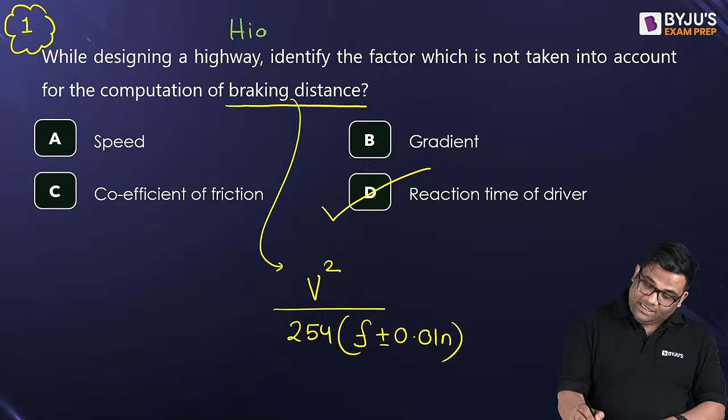So let me write down the subjects also - first question was from highway engineering, and second question was from Geotech. So we'll be mixing the questions.

Question number 3, RCC. Answer this question: lateral ties are provided in RCC column for what? Come on, answer this question very fast. I am waiting for your answer.

Lateral ties in RCC columns are provided to resist buckling of longitudinal bars. These are the longitudinal bars in a column, and we provide ties like this to avoid the buckling of the longitudinal bars. Correct answer.

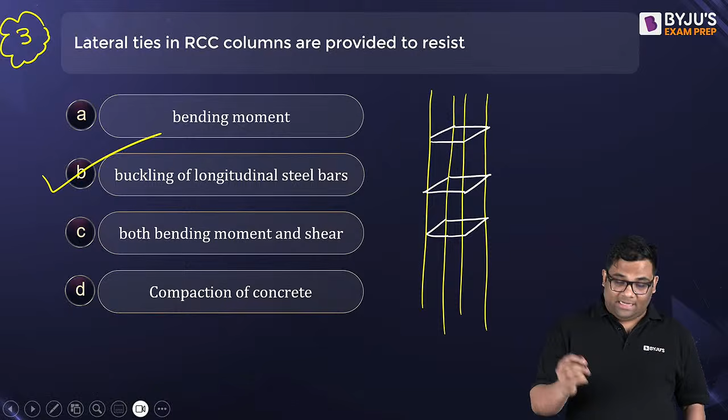This is from RCC. Next question, question number 4, also from highway engineering. Answer this.

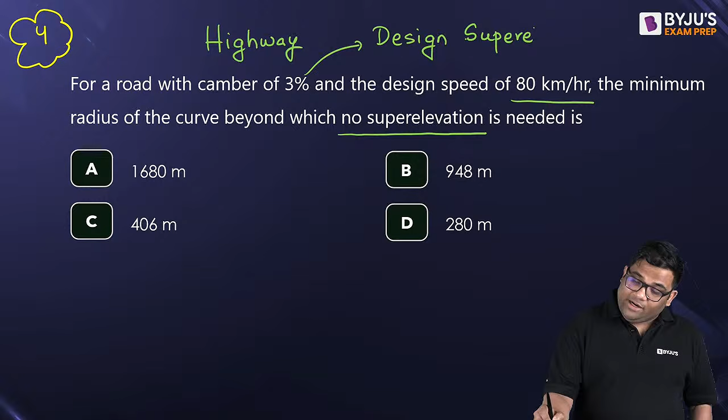Camber. For a road with camber of 3%, design speed is given: find the minimum radius of curve beyond which no super elevation is provided. That means this camber only becomes the design super elevation, and you know the formula for design super elevation. Put that and give me the radius.

What is the formula for design super elevation? It is V square by 225R. So here the camber becomes the design super elevation, that means this is equal to 0.03.

V we will take in kilometer per hour, that is 80 kilometer per hour, so 80 square, now divided by 225r. From here you can find out r, and r will be in meter. This formula is designed in such a way that r will be in meter.

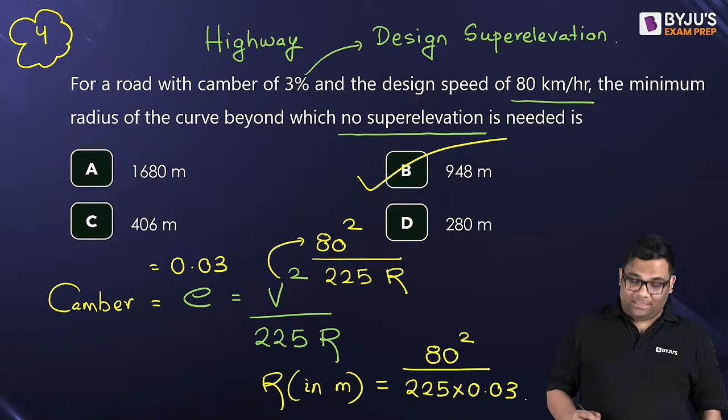Question number 5 now. What is the valid relationship for minimum shear reinforcement? Again another question from RCC. You are mixing the question and solving them, because in the final examination the questions will be mixed in nature. So what is the answer to this?

I will give you a hint. The spacing formula is 0.87 Fy Asv divided by tau V minus tau C into B. Whenever we are discussing the minimum shear reinforcement, you will replace this tau V minus tau C with 0.4. Now see which is the correct relationship.

So here I can write down 0.4 B into Sv less than equal to 0.87 Fy Asv. As many have answered, this is the right answer.

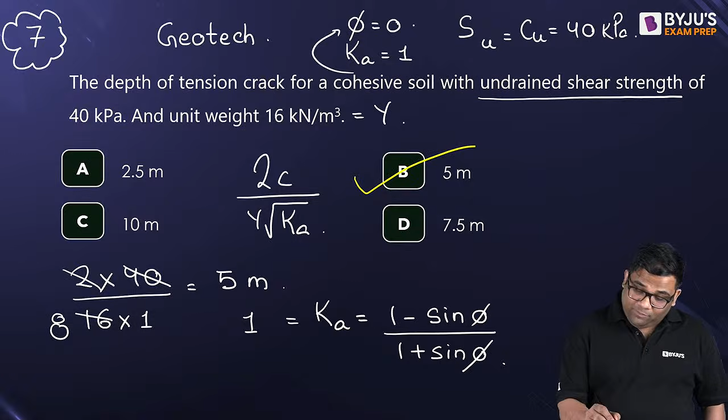Option B. 5 meter. It is what? Depth of tension crack.

See, if they are asking you critical height, that is 2 times of your tension crack. Yes or no? If they ask you critical height, that is 2 times of tension crack. It is what? Only depth of tension crack.

Very good. Question number 8. So again from RCC now. So we changed our subject from Geotech.

A little tricky question. Flexural cracks appear at bottom of a beam at tensile stress of 3.13 MPa. Means what? This is your modulus of rupture, because at modulus of rupture you get the tension cracks. 4c by gamma is for the critical height. It is tension crack which is different.

So FCR is given as 3.13, the modulus of rupture, right? And this is 0.7 root FCK.

And what is asked? Design compressive strength. The design compressive strength formula is 0.45 FCK. So what you are going to do? You are going to first of all find out the FCK from here, and then put it here and give me the answer.

Now solve this question. I give you some time, a little numerical nature. We'll solve some numericals also. Okay, some students have solved.

Very good. See, if you solve this, you will get FCK is equal to 20. So this will be 0.45 into 20, so that is 9 MPa.

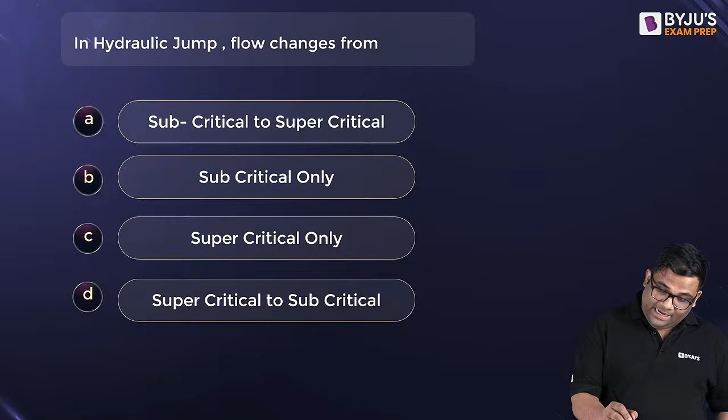Very good. Question number 9, open channel flow, OCF. As I told, we will be mixing the subjects because in the final exam, all subjects will be coming. Therefore, this mixed and fast civil sessions are very important.

Come on, very fast. In hydraulic jump, flow changes from where to where? This is a hydraulic jump. So what is the flow here and what is the flow here?

It changes from supercritical to subcritical. Here the flow is supercritical, that means the Froude number will be greater than 1. And here it is subcritical. Very good.

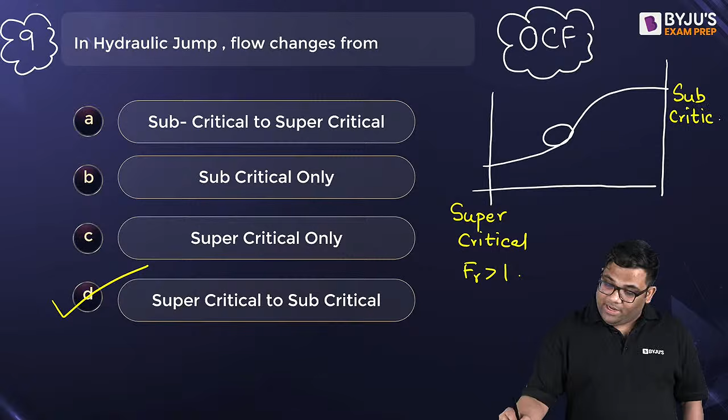Next question, question number 10, from traffic engineering.

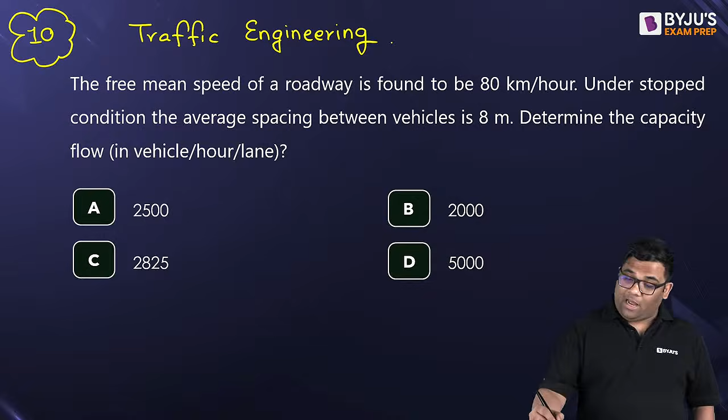Solve this question. The free mean speed is given, right? It is given 80 km per hour, that means this is your VSF. Now, under stopped condition, the spacing between the vehicles is given. This is the spacing within the vehicles at stopped condition, means jam condition, right?

Determine the capacity. Capacity means the maximum flow. And we know the capacity or maximum flow formula is VSF into Kj by 4. But how to find out Kj? Kj is nothing but 1000 by the spacing under jam condition.

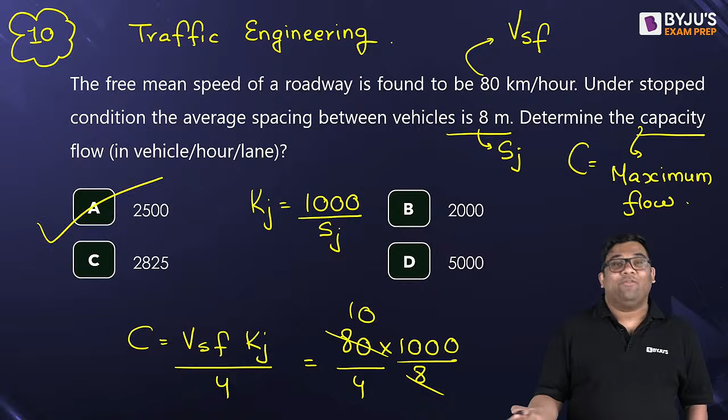So this I can write down as 80 into 1000 by 8 given, and then further divide by 4. So how much are you getting? You are getting a value of 2500. Very straightforward questions. So 10 questions we have completed.

You have to go very fast. Question number 11, again from highway engineering. Come on, solve this question. Grade compensation.

Highway engineering, grade compensation. I will not help you now. I'll give you some time. Come on, fast, fast. I'll have some water by that time.

See, 1 in 20 means percentage by how much?

Percentage wise, it is 5%. Now grade compensation means the reduction. So grade compensation is what? It is 75 by R, or 30 plus R by R.

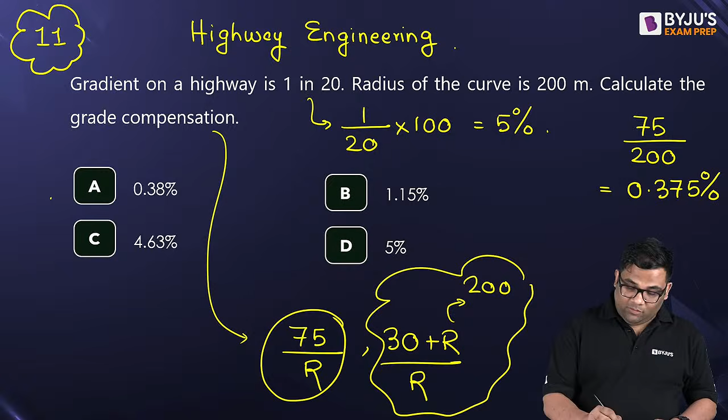You can see that if R is 200, obviously this will be very large, so we take the minimum one, 75 by R. So 75 by R, which is 200, I will get 0.375 percentage. Round figure is 0.38%. Very good. Question number 12, and this is from Geotech.

Come on, solve this question. Question number 12, Geotech. The stress at a point Z depth below a line load. If we have a line load, what is the stress at a point Z depth here? What is the formula?

What is the formula? Let us see who answers this question correctly. Fast, fast, no time. You have to do it very fast. We have to complete the whole session before 75 minutes, 100 questions. Yes, the answer is D.

2Q by pi Z. If it was a point load, what is the formula? Point load is 3Q by 2 pi Z square, right? Just below the point load, it is 3Q by 2 pi Z square. It is 2Q by pi Z, not Z square, just Z.

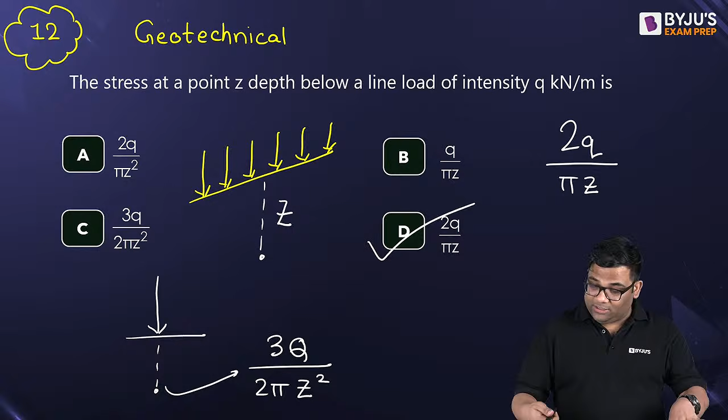Yes, very good. Question number 13 from RCC. So we switch the subject. For a span of continuous beam of length 13 meter, what is the allowable span by depth ratio? Yes, correct Akhil, not Z square, only Z.

Come on, fast, span by depth ratio. See, the ratios are 7, 20, 26, right, for cantilever, simply supported and continuous.

But here, this is for span less than 10 meter, otherwise we multiply by 10 by span. So span here is 13. So you can see getting how much? 20. Very good. Question number 14.

Okay, from soil mechanics, very fast. Grain size distribution. What is the answer to this? Steep graph. If we have a steep graph in your grain size distribution, then that means what? Like this, what is the meaning of this? Yes, it is uniformly graded.

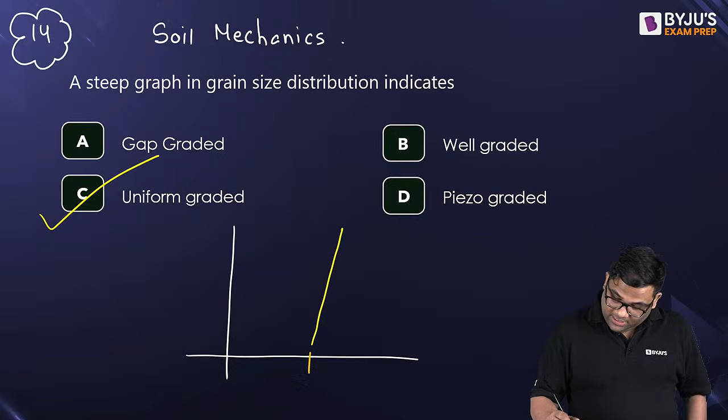See, that means most of the particles lie in this small range. Means uniform size, uniformly graded. Very good. Question number 15.

Again from OCF, question number 15. Come on, answer very fast. For an efficient rectangular channel, yesterday I took one video on this. For an efficient rectangular channel or section, hydraulic radius is found to be 0.62. The width of the section, what is the answer to this? Let us see who answers this correctly. What is the width of the section?

See, hydraulic radius is given as 0.62 meter. Now that is Y by 2 for a hydraulic efficient rectangular channel. So I can say Y is 1.24 meter. And what is the width of a hydraulic efficient channel? It is 2Y. So answer is 2 into 1.24 meter. How much is the answer?

2.48. Understood this? See, hydraulic radius is given this one, and this is Y by 2. We know the formula. This is for an efficient rectangular channel. Yesterday also I took one video in the round series, also I taught this, right?

Yes. Everybody clear with this question? Answer is 2.48. Everybody is clear? Akhil has answered correctly. Shall we move to next question? Clear ho gaya? Okay, let us go to the next question.

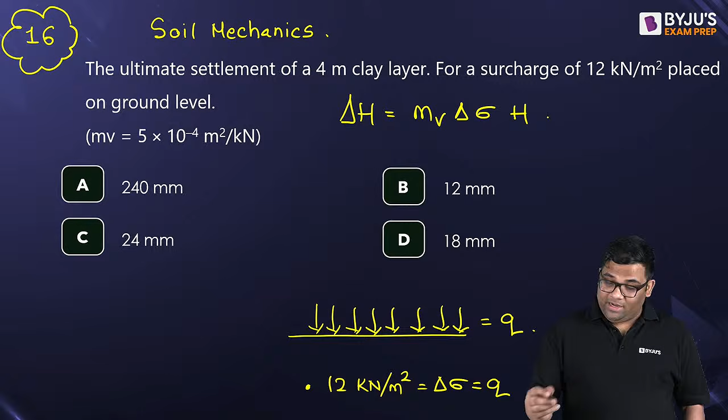This is the formula. Now I have told in many videos that whenever there is a surcharge, the increase in stress at any point will be equal to the surcharge. So delta sigma will be equal to the surcharge, right? Now mv is given, H is also given.

They have asked in mm, so I'll put this as 4000 mm. So what is the right answer? It is 5 into 10 to the power minus 4. The stress increment is 12. You see the units, it is meter square per kilonewton, and this is kilonewton per meter square, so these two get cancelled. And then this is 4000, I can say 0.4 into 10 to the power 4.

Question number 17, from railway engineering. Come on, answer this. The ruling gradient is given as 1 in 250. If you find out the percentage, this is 1 by 250 into 100. I can say this is

0.4 percentage. The horizontal curve is 3 degree. So what is the permissible compensated gradient? First you find out the grade compensation. Yes, it is a BG track, means what? The grade compensation will be 0.04 into the degree, so this is 0.12 percentage. So I can say the compensated gradient, many students have answered also, very good. The compensated gradient will be equal to 0.4 minus 0.12, that is how much?

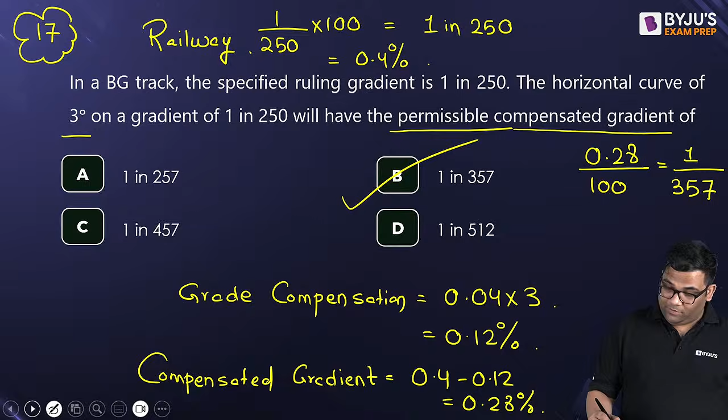Something from strength of material now. The ratio of modulus of elasticity or Young's modulus and modulus of rigidity is given, how much? If the Poisson's ratio is given as 0.2. Very straightforward question, you need to know one very simple formula. What is the answer to this? Come on, very fast. I'm going slow, we are going slow, no, we have to make it fast. How much is this? Tell me, ladies and gentlemen.

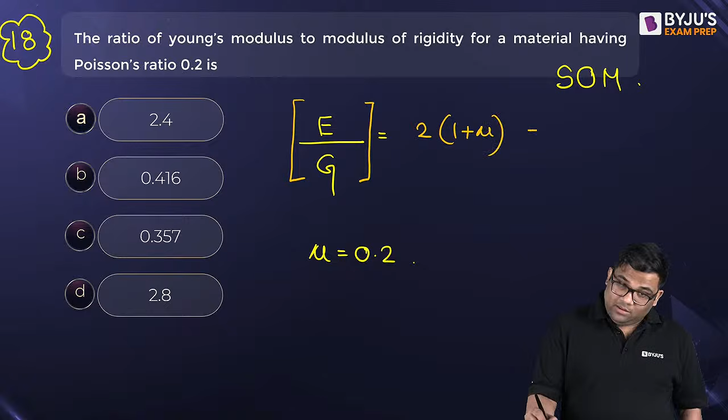What came? The formula is 2 into 1 plus mu, na? So what is the answer now? It is 2.4. Very good.

Next question, question number 19. Anchorage value, RCC returns. Tell me. The anchorage value for a 135 degree bend in a 20 mm dia bar is how much?

Anchorage value for 135 degree. For 45 degree the anchorage value is 4 phi. For 90 degree it is how much? 8 phi, right. For 135 it is 12 phi, and for 180 degree bend it is 16 phi. So the answer is 12 phi. So 12 into 20, that is 240.

Correct, everyone is very correct. Very good, so we are going very fast. Question number 20, now traffic engineering returns.

Very typical question now, and many students will be thinking, sir, why we are solving all the typical questions? Because in this year's ESE examination and GATE exam, many questions are very simple also. In every paper there will be 40% or 50% questions which will be like this, straightforward, right? So we need to practice this question, and in the individual sessions I will be conducting tough, difficult questions also. I'll conduct some sessions on difficult questions also. But we need to balance the tough questions and easy questions also, so everything has to be balanced, otherwise we forget the easy questions.

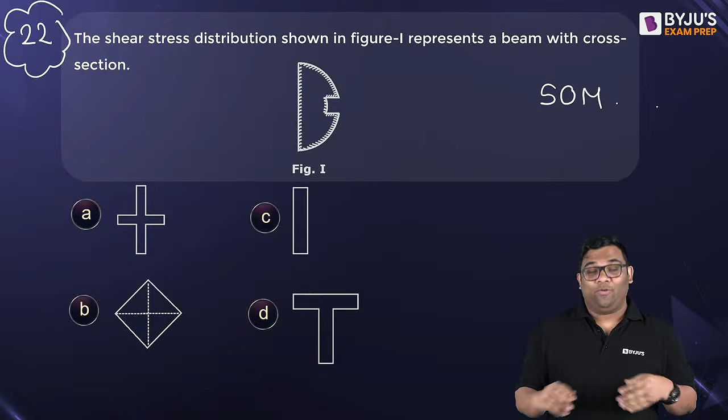SOM, strength of material, shear stress distribution. So you can see that this session has predominantly questions from Geotech, Transportation, RCC, and so on. In this session I am not touching fluid and environment. I will conduct a separate session for fluid and environment.

Answer is which one? A, B, C, D, E, F, G, H. Which one? Answer is A. See, shear stress is inversely proportional to width.

So what happens? You see here, if you see the distribution, it varies parabolically. Then what happens at this section? The width increased, right? Width increased means the stress will reduce. And then here the width decreases, so stress again increases. Understood? So answer is A.

We use this relation: shear stress is inversely proportional to width, and it follows parabolic distribution. And at top zero, bottom zero.

Question number 23, very easy question from building material. The mix design code is which one? What is the code for mix design? Come on, very fast. Yes, 10262. Yes, this is for ductile detailing. This is for what? This is for ductile detailing.

Very good, next question, this is from BMC, building material. Next question, 24, we also have from airport. It is from airport engineering. Please answer this question: the runway length after the elevation and temperature correction is this one.

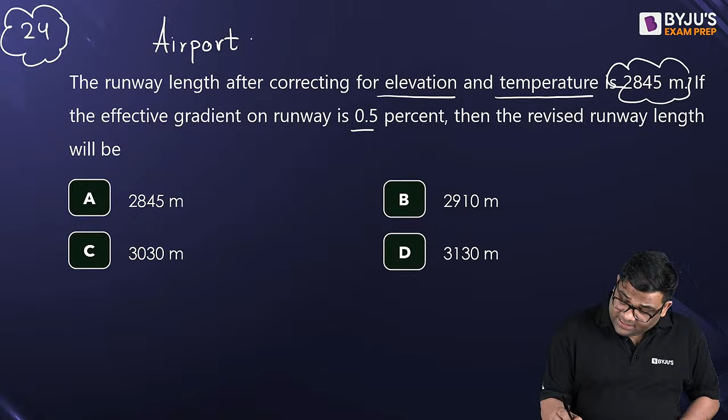Yes, the effective gradient is given as 0.5%. What is the revised runway length? Very straightforward question, please answer fast. We know the correction: for 1% gradient we have to increase the runway length by 20%, right? And here the gradient is 0.5%, so we have to increase the runway length by how much? 10%, right?

So I can say this revised runway length, increased by 10%, means 1.1 times of 2845. It amounts to approximately 3129, so 3130 meters. Understood? Next question, 25th question.

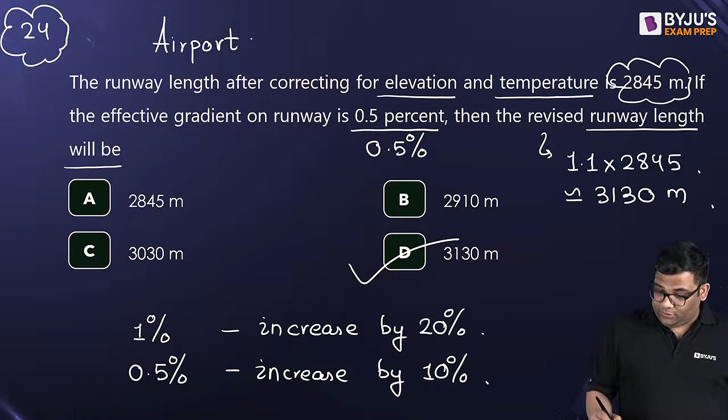Crippling. Because there is failure by rupture or fracture, there is failure by block shear, and there is failure by yielding also. But that doesn't happen in crippling for tension members. Crippling mostly happens in compression members, and in beams also.

Yes, this is the formula. So 20 mm is the answer.

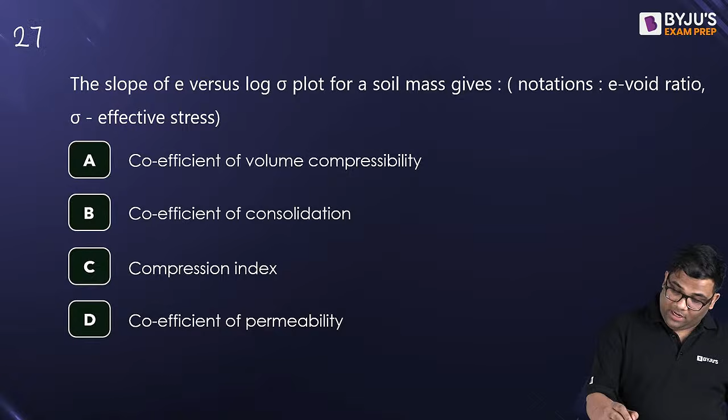27th question, from soil mechanics. The slope of e versus log of sigma - what is this? Slope of e versus log of sigma, what is this? Tell me.

We get a straight line. What is the slope of this? The slope is delta e by log of sigma 2 by sigma 1, if we take 2 points. So what is this known as? Tell me, what is this known as? This is compression index. Yes, this is nothing but compression index.

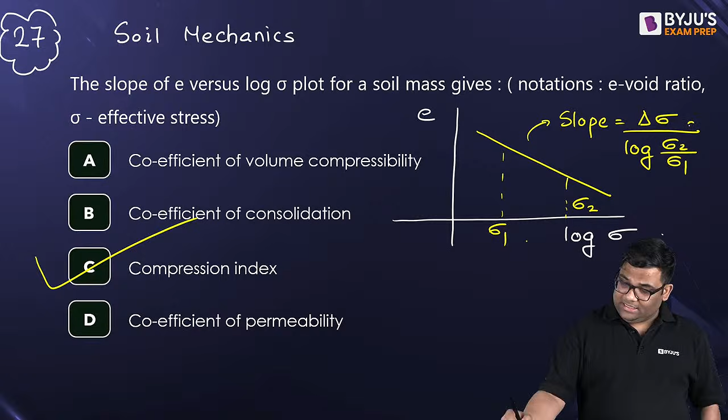Correct answer. 28th question, okay, something on SOM - shaft, power, etc. So SOM, strength of material. Come on, fast, answer fast, answer fast. You have done 28 questions from different subjects in half an hour.

We have to be a little more fast. Come on, what is the answer to this? What is the power formula? It is 2 pi NT by 60,000 if you are interested in finding the power in kilowatt.

So what is the answer? 2 pi, N is 150 and T is given as 1500, right? Divided by 60,000, so 3 zeros get cancelled, right? This is 4 and this is 2. So I am getting 7.5 pi kilowatt. So answer is C.

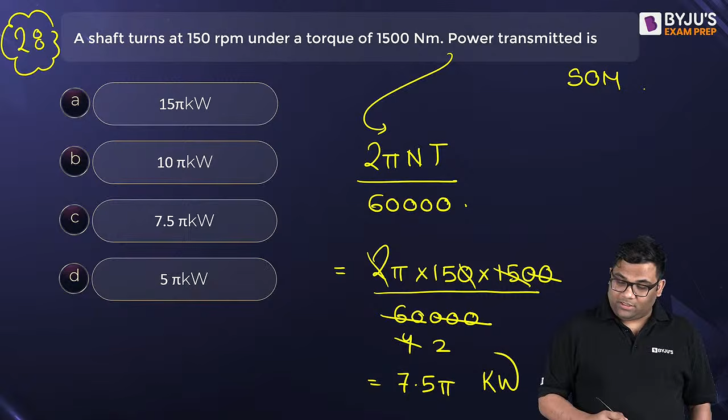Very good, question number 29, building material - test on building material, test on cement. Please match the following and give me the answer. I'll give you some time. Match the following, do it nicely.

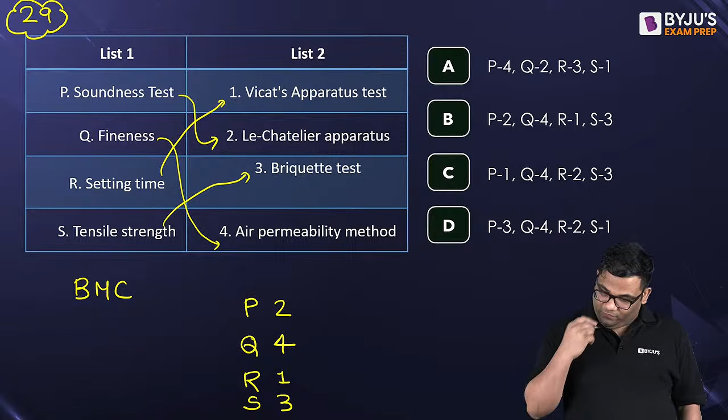Correct, 30th question. Okay, something on pre-stress now. Deflection in case of pre-stress concrete. See, RCC is different from pre-stress concrete. I always treat it differently.

Next question, 31st question. Okay, something on airport engineering. Airport reference temperature, ART, airport reference temperature. Very easy question, very easy question.

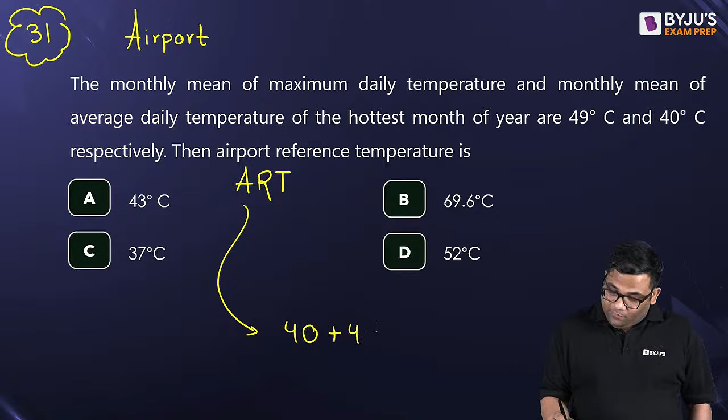Answer is what? See, it is 40 plus 49 minus 40 divided by 3. So answer is 43 degrees centigrade.

Very good, 32nd question. Okay, strength of material. Answer a little attentively. In a triangular section, where does the maximum shear stress occur? Answer this question a little attentively.

Yes, it is D, very good. See, the shear stress distribution is something like this. The neutral axis is at h by 3. But we don't get the maximum at the neutral axis, we get the maximum at the mid height only. And this maximum one is 3 by 2 of average shear stress, whereas at the neutral axis it is 4 by 3 of average shear stress. So this is 1.5, and this is 1.33. So obviously 1.5 is more. So the answer is h by 2.

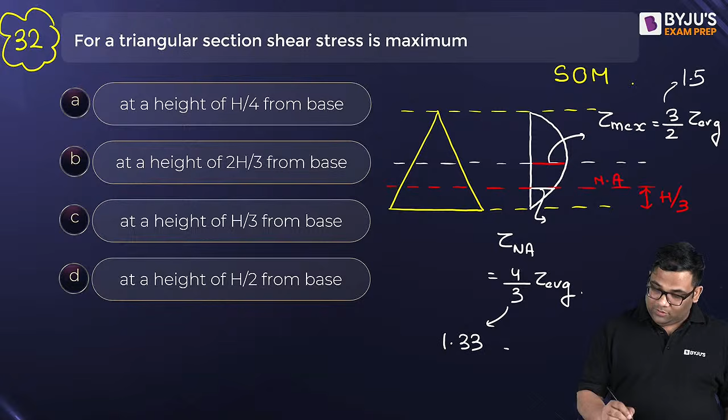Very attentive, right? 33rd question. Okay, so bearing capacity, I can say foundation engineering. See, I treat soil mechanics as different from foundation engineering. Foundation, or I can say foundation belonging to geotech, I normally treat it differently. So what is the answer to this?

Identify the factor that doesn't affect the bearing capacity of a purely cohesive soil. In a purely cohesive soil, what happens? The N gamma is 0, right? And we know that if N gamma is 0, NC is 5.7.

It doesn't depend on the width of the footing. Why? If we see the equation, the last term is CNC plus QNQ plus this gamma term. So when N gamma is 0, this term vanishes. So it becomes independent of the width of footing.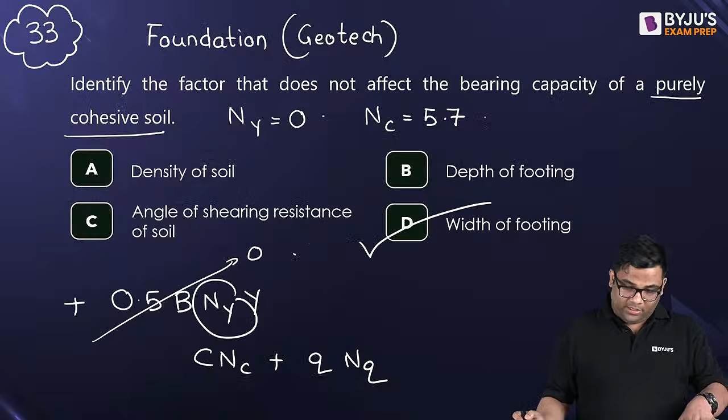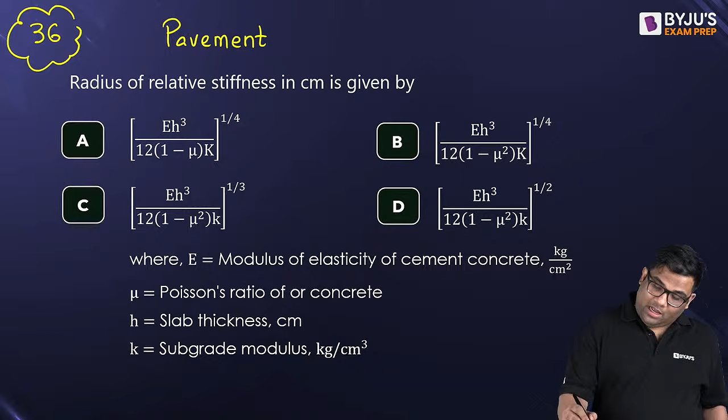Right, next question is the 36th question. This is from pavement design. Radius of relative stiffness, straightforward formula. In many examinations they ask you the straightforward formula also.

They might ask you a numerical based on a straightforward formula, so you should know the formula. Which one is the right formula here? The answer is B. E is the modulus of elasticity of concrete, then the depth of the concrete slab cubed divided by 12. K is the modulus of subgrade reaction, then 1 minus mu square, where mu is the Poisson's ratio of concrete, then to the power 1 by 4. Remember this.

Question number 36 or 37, strength of material, a good question. Read the question and solve it. I'll give you some time to solve this question.

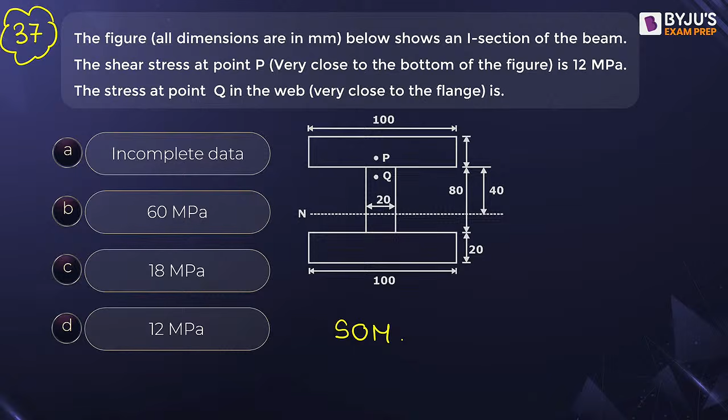Yes, ladies and gentlemen, it's B. We know that shear stress distribution is inversely proportional to the width, as I told you before. So the shear stress in the flange and the shear stress in the web will be in inverse ratio of the width of the web and width of the flange.

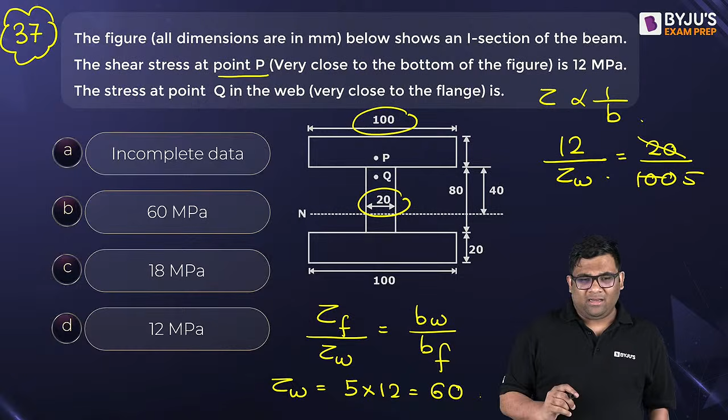Now see what is given: the P point is in the flange. So the stress in flange is given, and stress at Q in the web we have to find. What is the width of the web? It is given as 20. What's the width of the flange? It is given as 100. So the ratio is 5. So the shear stress in the web is 5 into 12, which equals 60. Even you can find this easily, no extra knowledge is required.

I'll go a little backwards, so I become small now. And if I come front, I'm becoming a little bigger. I go sideways, no, answer this question.

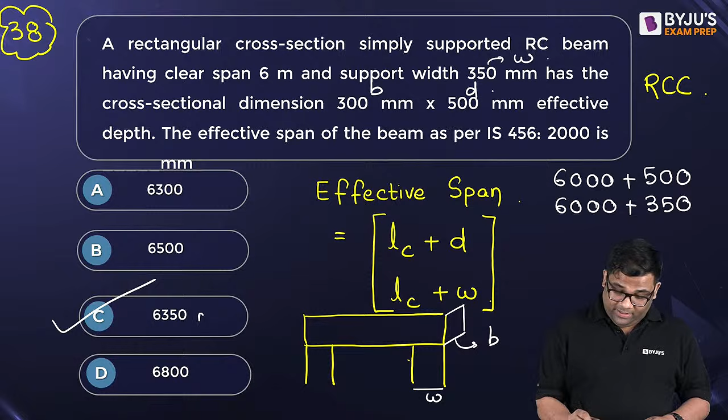This is the column and this is the beam. So we have to take the width of the support, this is the width. Width of beam is something else, suppose this beam is like this, this is the width of beam, it's different. You can see LC is given as 6 meters, so 6000 plus effective depth, which is given as 500. Clear span is 6000 plus width of the support, given as 350. Minimum of both is this one. A very good question, and students do get confused in such kind of questions, but obviously you will not get confused.

Can I get rank under 100 by using YouTube lectures? Some students might get, but 99.9% won't get. So you should subscribe to some particular course. You will not get rank under 100 by only following YouTube lectures. Someone might get, but not in general. Okay, let us go to the next question.

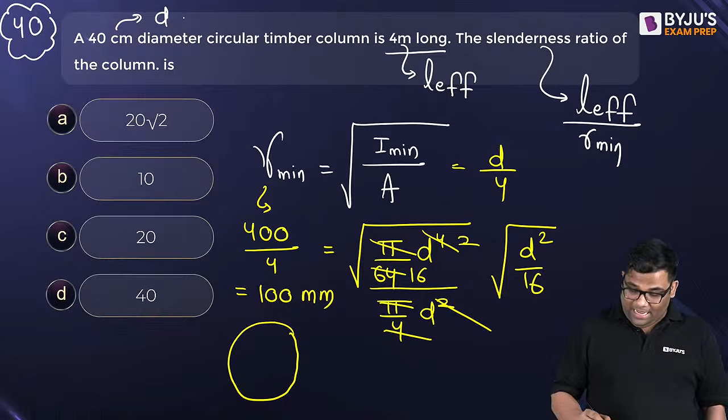So this is how much? D by 4, and D is 40, so I will get R minimum is how much? 40, I can write down as 400 mm, so divide by 4 I get 100 mm. So R minimum is 100 mm, I will erase this. So R minimum is how much? It is 100 mm, right?

Effective length is given 4 meter. Some students have found out the answer also. So slenderness ratio is L effective by R minimum, that is equal to 40. Very good, 40, it's not a length, it's a ratio. So answer is D. This was question number 40. Very good, nice coincidence you see - 40th question, 40 centimeter diameter, and the answer is also 40.

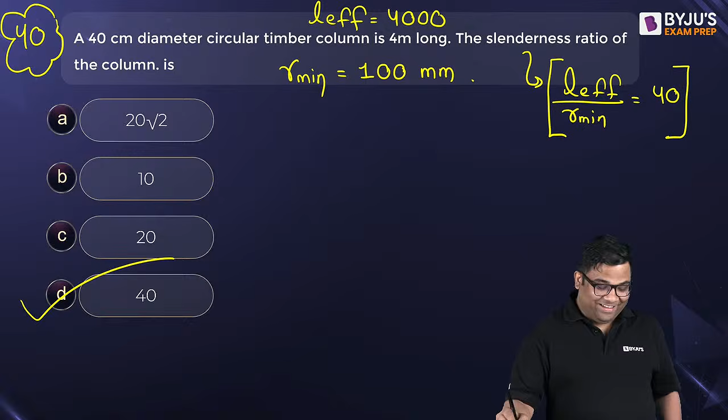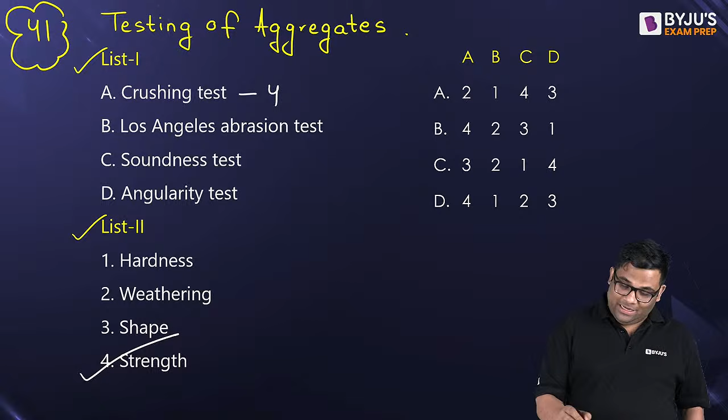B, crushing test - crushing test is for strength, so 4. Then Los Angeles abrasion test is for hardness, so 1. Soundness test is to check the resistance to weathering action, so 2. Angularity test is shape test, so 4, 1, 2, 3. Answer is D, answer is D here na? 4, 1, 2, 3, so D na?

I think D, I have committed some mistake. Crushing is 4, Los Angeles abrasion is 1, yes. Soundness is 2, and angularity is 3. So 4, 1, 2, 3. Yes it is D, yes D.

42nd question. Again, so soil mechanics - we have written so many questions on RCC and all, now soil mechanics question, answer this question. Which of the following laboratory method is used for determining the coefficient of permeability? Very easy question, very easy question, sometimes they ask you very easy question. Yes, both tests are conducted.

Constant head we conduct for your coarse grained soil, and falling head we conduct for your fine grained soil. But we do conduct both the tests, right? So the answer is what? Both 1 and 2. Very good.

Question number 43. Now again RCC, returns the maximum area of steel. Okay, what is the answer? Now I will give you some time to solve this. So solve this and give me the answer - maximum area of steel, I'll sit for some time.

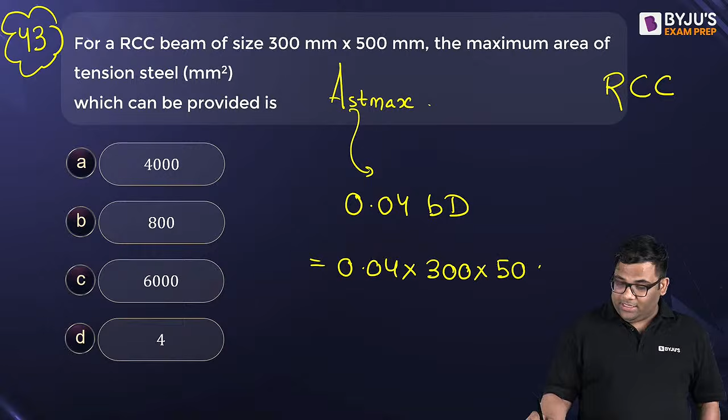Yeah, Karthik has replied, very good. So this is what? 4%, so 0.04 of B into D. Straightforward, so 0.04 into 300 into 500. This gives the answer of 6,000. Very good, so let us go to the 44th question.

What is this? What does this represent? EI, the triple derivative of Y with respect to X - what does it represent in a beam? What does it represent in a beam? Let us see who answers this question. Little interesting question, okay some people answered very good - it is the shear. Because you see, Y is the deflection, this is the beam.

Y is the deflection at any point. This is the deflection. And dy by dx is the slope. Now EI times the double derivative of y with respect to x is the bending moment. And if you do the triple derivative, this becomes the derivative of bending moment with respect to x, and that is the shear force.

So the answer is D. Question number 45, this was from strength of material. Okay, let us go to the next question.

Soil mechanics. Which of the following types of submerged soil is subjected to liquefaction under earthquake loads? Which type is more susceptible to liquefaction? Answer this question. C? Are you sure it is C?

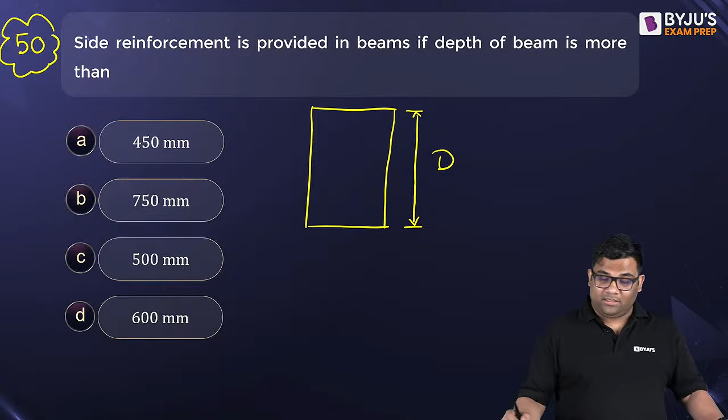Very good. 50th question again from RCC - side face reinforcement is provided when the depth of the beam is more than how much? We saw the percentage of side face reinforcement, but in which condition do we provide this? This is from RCC. So 50 questions are over, congratulations, 750, very good.

Question number 51, from soil mechanics, answer this. So in this session, mostly I have given questions from soil mechanics, RCC, strength of material, steel structures and transportation - 5 subjects I have mixed. In the next mixed civil session, I will not tell you which subjects I am going to include, so you have to continuously revise your subjects so that whenever I conduct such a session, you are ready. The next session I will conduct after 10 days.

That time also I am not going to tell you which subjects I am mixing. You have to keep on practicing questions.

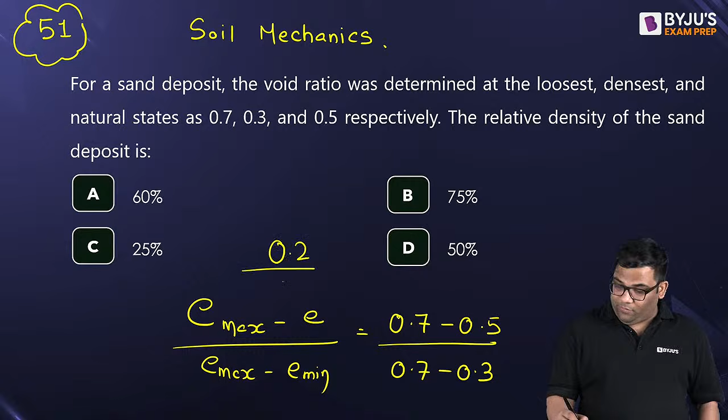Okay, relative density formula is what? E maximum minus E by E maximum minus E minimum. So I can say that is 0.7 minus 0.5 divided by 0.7 minus 0.3. So 0.2 by 0.4, it is 50%. Answer is D. Very good.

Question number 52. Tensile strength of concrete is ignored in which limit state? 52nd. Come on, fast.

Where we ignore the tensile strength of concrete, it's an assumption in both limit states - flexural limit state or compressive limit state. The tensile strength of concrete is ignored in both of them. So when we are designing the beam and when we are designing the column, in both places we ignore the tensile strength of concrete. We only consider the compressive strength of concrete, and we assume that all the tension is taken by the steel. Remember this again, whenever we are designing an RCC column or beam, we ignore the tensile strength of concrete. We assume that whatever tension is coming, that is taken by the steel, and concrete is taking the compression.

53rd question, soil mechanics, time factor. Degree of consolidation given is 40%, so time factor is what? You see, this is less than 60%. When this is the case, what is the time factor? Tell us time factor formula. It is pi by 4 into U by 100 square, right? This is the formula, right? So I can say this is 0.785.

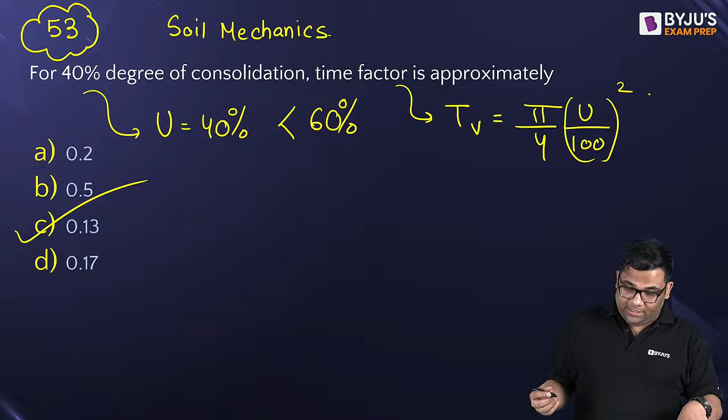54th question, okay, theoretical question from RCC. When the mild steel is replaced by HYSD steel bars, what happens? Tell me the answer. B, yes, bond stress increases by 60%.

Very good, straightforward. 55th question. When the fusion angle is 104, so we have two members like this and we are doing a welding and the fusion angle is 104 degree. So what is the effective throat thickness? It is K into S, na? So what is the value of K? Tell me the right answer to this.

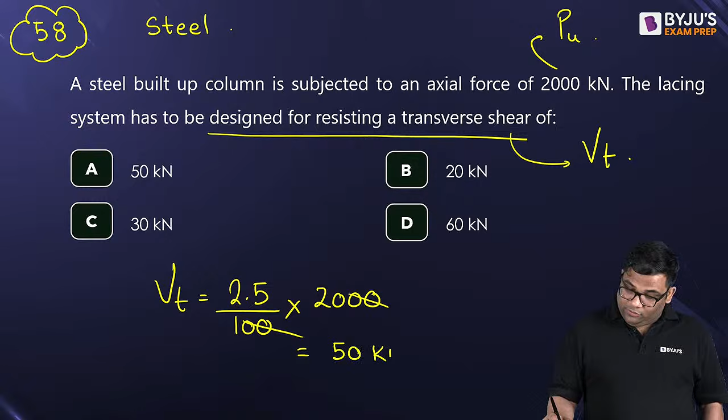Question number 59, again RCC returns. The minimum strain at failure in the tension reinforcement of RCC when we have Fe415 - what is it indirectly asking? The yield strain, because this is the minimum strain at which failure will occur. So the yield strain value for Fe415 is how much? The formula is 0.87 Fy by Es plus 0.002. You put 415 here, and this divided by 200 gives you a value of 0.0038.

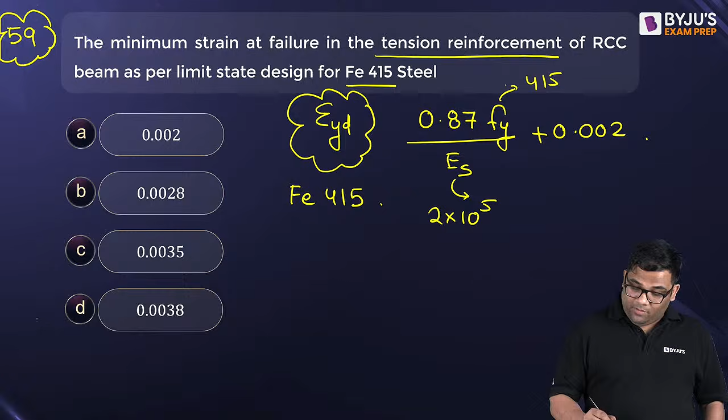Answer is D. Very good.

Next question is 60, load factors, RCC only. Design bending moment: dead load bending moment is given as 20, live load bending moment is given as 30, and seismic load, the earthquake load, is given as 10. The wind load is missing here. So tell me the answer now.

Let us see, is it 72 or 75? The answer is 75. We have to consider this combination also: dead load plus maximum of live or earthquake. When you take this combination, 1.5 of 20 plus - sorry, not earthquake, we'll take live load because that is the highest one - 20 plus 30, I am getting 75. When I take the combination of 1.2 dead load plus live load plus earthquake load, I am getting 72. But I have to take the maximum one, so I'll use 75.

So the answer is B. Question number 61.

First, the limiting depth of neutral axis, XU limiting, per IS 456 - what does it depend on? Grade of concrete, grade of steel, both, or none? Tell me, come on, answer the question.

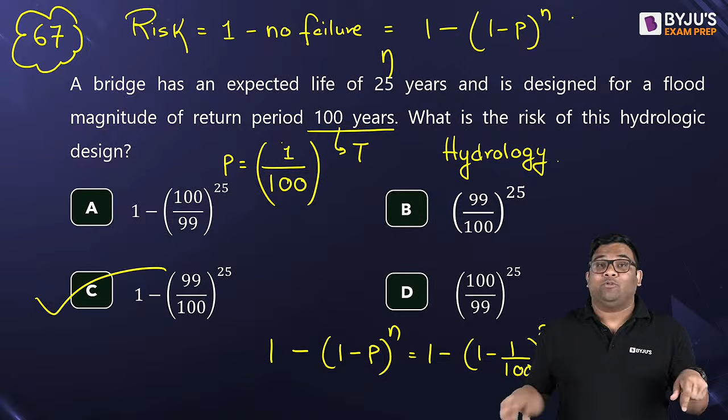Question 68: effective span of a cantilever beam. Very straightforward question, answer this. The answer is clear span plus d by 2.

Question 69: the equivalent shear stress of a weld subjected to a shear stress of Q and a bending stress of F. What is the formula? We have F square plus Q square, but associated with a factor of 3, which is associated with the shear stress. So the answer is C.

Steel structures, welding connections. Question 70, again RCC. We know that in the span by depth ratio, we have some correction factors associated. Now, which of the following correction factors is not applied? Read the question carefully, it says not applied. We are not applying those correction factors.

So today I am moving a little also. Every time I am sitting in the chair, I was feeling a little bored. So I thought let me now conduct the classes where I'll be moving also, so that you also don't feel bored. Otherwise, seeing the teacher always sitting like this, constant for 1 hour, feels boring.

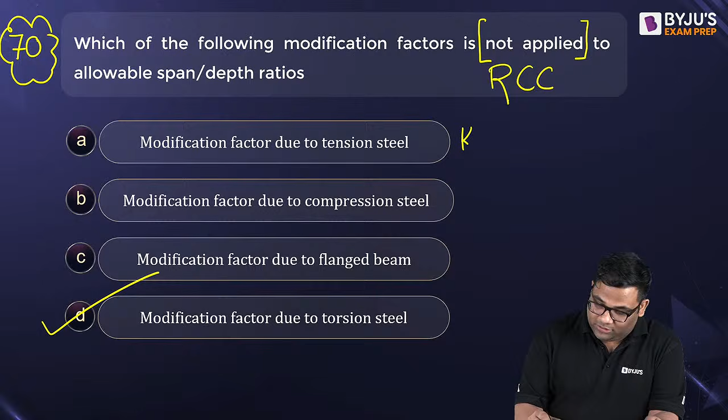So what's the answer to this? D, yes. There is nothing called a torsion steel correction factor. We have KT, KC, and KF - three correction factors. Very good.

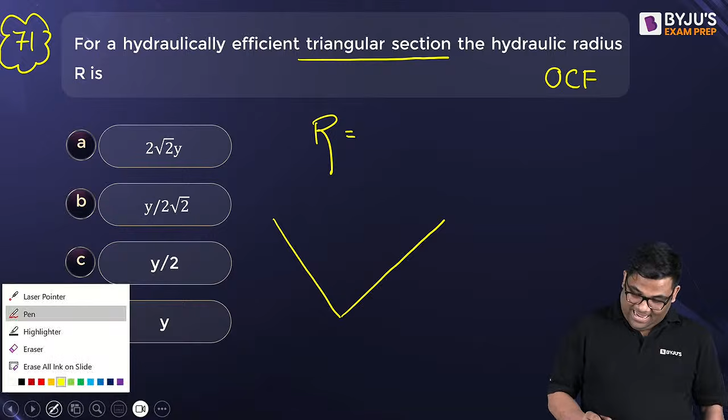Question number 71. For a hydraulically efficient triangular section, what is the hydraulic radius R? If you have a triangular section, not rectangular, if this is the central depth y, then R is y by 2 root 2. Remember this, for triangular efficient section, this is the answer. Now R equal to y by 2 is applicable for rectangular and trapezoidal channels only, not for triangular, where it is y by 2 root 2.

Very good. Question number 72, something on steel structures again. The percentage reduction in shear strength for a packaging plate being used in a joint. For this we need the correction factor for packaging.

What was the formula? It was 1 minus 0.0125 into thickness of the packaging plate, which is given as 10. This factor comes out as 0.875. So the reduction percentage: this factor is multiplied, suppose it was 10, so if you multiply this, it becomes 8.75. So the percentage reduction is 10 minus 8.75 divided by 10 into 100, getting 12.5 percentage.

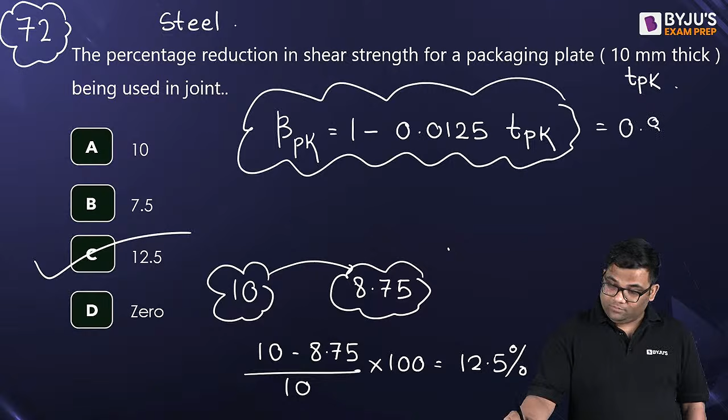So this is the reduction factor in the shear strength when we have packaging plates. Suppose we have one main plate like this, the other main plate like this, and we provide some packaging here. Due to this, there will be reduction in the shear strength, and that depends on the thickness of this packaging plate.

Next question, 73rd question, RCC, regarding footing. Suppose this is the footing and we have a column also. We have some critical sections where we find certain parameters. This is the column, and this is the footing, top view. Now tell me which is the right answer, match the following.

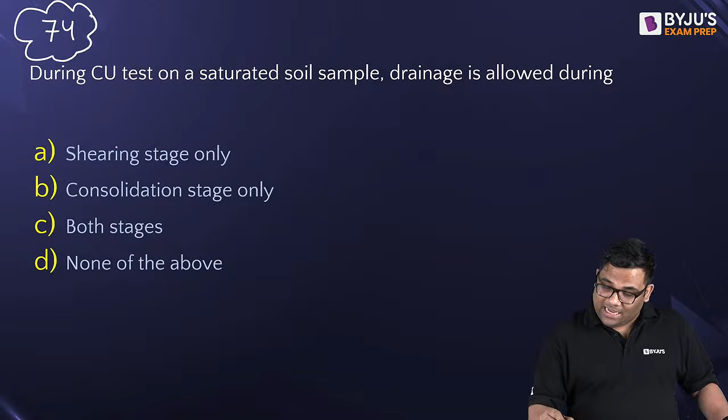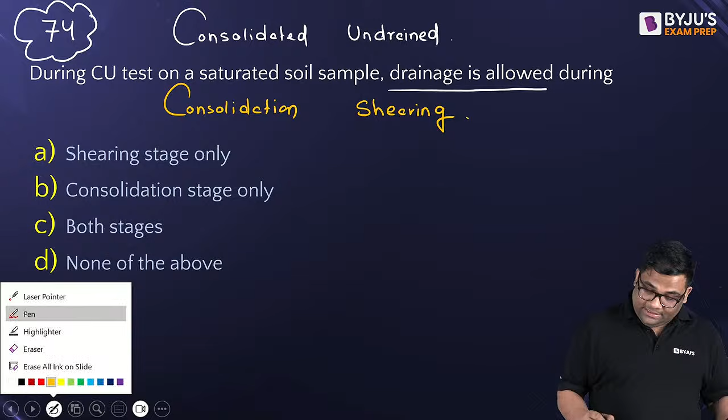During CU test, drainage is allowed in which stage? CU is consolidated undrained. Which is the first stage? The first stage is the consolidation stage, and the second stage is the shearing stage. So when discussing drainage, consolidated means drainage is allowed, so tick that. Undrained means, in the shearing stage, drainage is not allowed. So the answer is: drainage is allowed only during the consolidation stage, option B.

If it was a CD test, consolidated drained, in that case both stages would allow drainage. If it is UU, then drainage is not allowed in any stage.

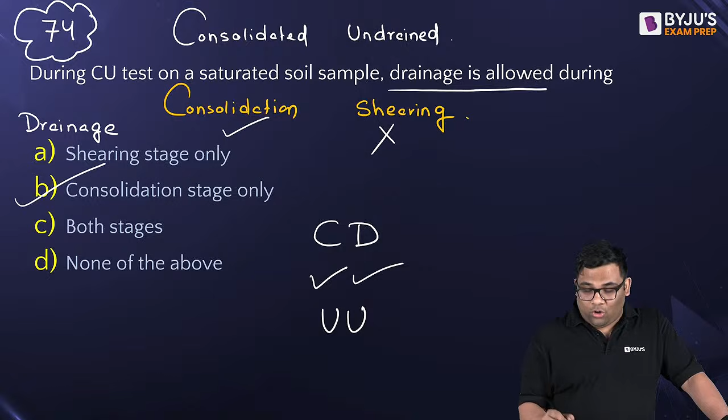Next question, 75th question, on pre-stress concrete. Come on, answer this question, a theoretical one. 25-26 questions to go, let's see if we can complete before 6:45. Come on, quickly, quickly.

Which of the following is a long-term loss? Option B is not long-term. Friction loss is not long-term, it happens instantly. Friction loss, elastic shortening loss, and slip loss are immediate losses. Long-term losses are shrinkage, creep, and relaxation of steel. So the answer is relaxation of steel.

76th question, one irrigation question I've put in between. Come on, answer this question.

The ratio of water stored in the root zone to the water delivered to the field - this efficiency is known as water application efficiency. What is conveyance efficiency? It is how much water reached the field divided by how much was diverted to the field. What is storage efficiency? How much is stored in the root zone divided by how much is needed in the root zone?

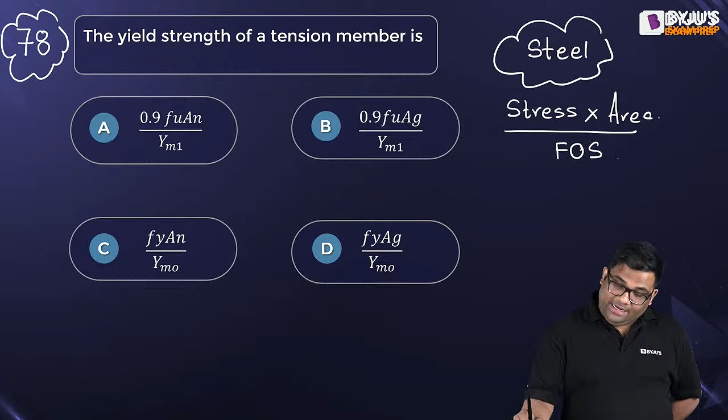The formula is stress into area divided by factor of safety. Whenever we are finding yield strength, the factor of safety will be gamma m naught, and the stress will be Fy. Whenever we are finding yield strength, we take the area as the gross area. So the answer is D. Stress I will take as Fy, area as gross area, and gamma m naught. If it was rupture strength, then stress would be 0.9 Fu.

Area I would have taken as net area, and factor of safety as gamma m1. So this formula is for rupture strength. These two formulas don't just exist randomly - this one is the yield tensile strength, and this one is the rupture tensile strength. Both are tensile strength only. Hope now you remember the formula, right? Very good.

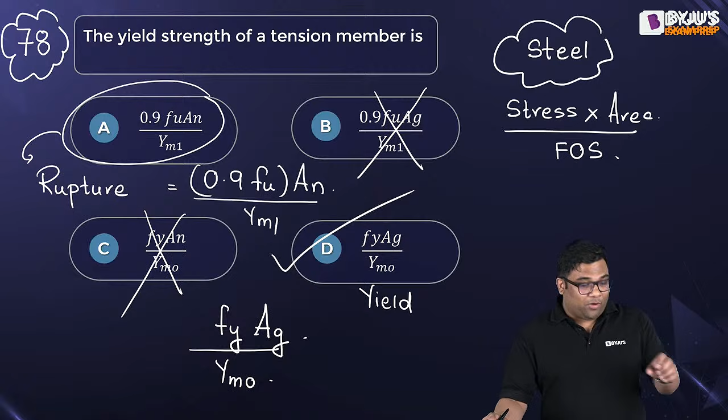Come on, chalo jaldi, we have 21 questions to go. So let us have an IPL mode. We have to complete before 6:40 PM. So how much time do we have? We have 12 minutes. So 12 minutes and 21 questions, like 12 balls and 21 runs kind of thing, right?

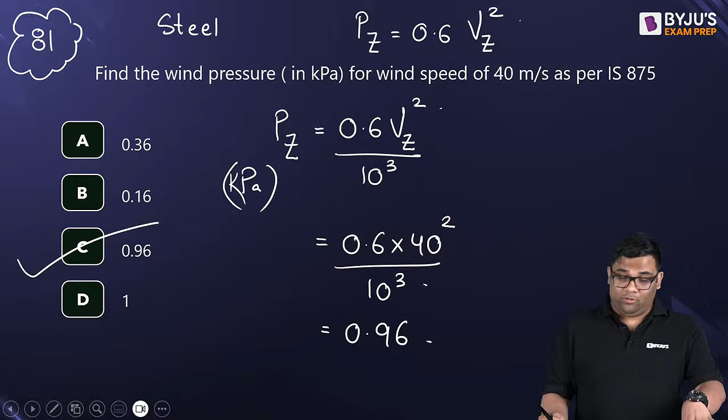82nd, 83rd. Okay, another question from OCF now. Come on, fast.

You see, I have done ultimate mixing of questions from OCF, irrigation, then RCC, steel structure, strength of material, and geotech, and also some questions from highway engineering, airport, railway. So I've done a lot of mixing here. Next sessions I will be mixing some environmental also, but I will not tell you which subjects I will mix. I will never tell you. That is the suspense.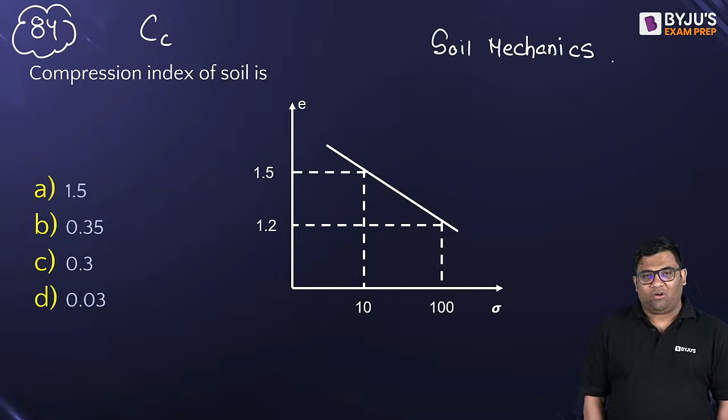So 0.3, very good. CC is what? Delta E by log10 of sigma 2 by sigma 1. This is sigma 2, this is sigma 1. So sigma 2 by sigma 1 is 10, so log 10 is 1. So delta E is how much? 1.5 minus 1.2, so 0.3.

Very good, 85th question: alternate depth in case of open channel flow. What is the meaning of this alternate depth? What do they have common in alternate depth? Tell me, what is common in alternate depth?

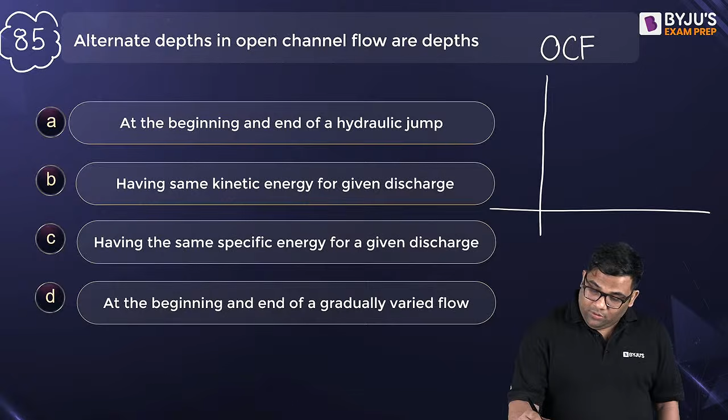See, if we draw Y versus specific energy, we get a curve like this. So at a particular specific energy, you can see there are two depths, and they are known as alternate depths. So they have the same specific energy for a given discharge. So the answer is C, very good.

86th question, RCC and steel. This is applicable for RCC also, and also as per IS 800, this is the same provision. What is given? It has both translation and rotation restraint at one end. At one end, both translation and rotation are not allowed, while only translation is restrained at the other end, meaning rotation is allowed.

Means rotation is allowed, means what? This is fixed end, and this is pinned, because in pinned, the rotation is allowed but translation is not allowed. Restrained means not allowed. So in this case, what is the effective length factor?

It is 0.8. Theoretically, this becomes L effective by root 2, so 0.707 L effective, meaning L by root 2. But the thing is that as per code, there is nothing called complete fixity, therefore it takes 0.8. So the answer is 0.8. Understood this question? Yes.

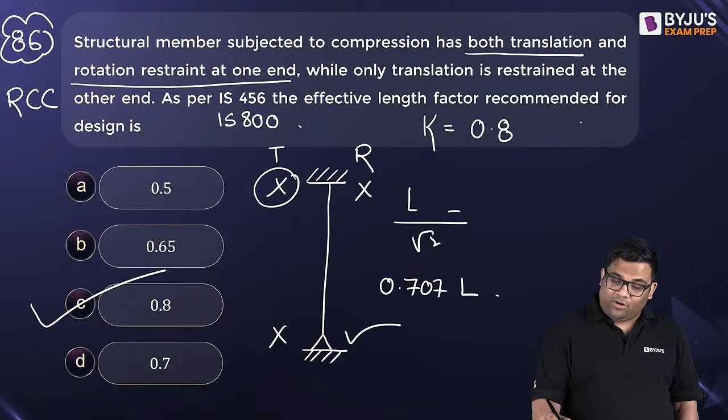Both translation and rotation restrained at one end, restrained meaning not allowed, and only translation is restrained at the other end. Good question, very good. 87th question.

Something on traffic engineering, let us see who answers this correctly. 86, 85, okay 87. This is traffic engineering. Come on, answer this question, let us see who answers it correctly.

Safe speed limit is the xth percentile speed, and design speed is the yth percentile speed. So what is the answer? Read the question completely, don't jump. It is y minus x that is asked. Don't jump, read the question.

Very good, Sajid, very good. See, this is 98th percentile, and safe speed is 85th percentile, right? So y minus x is asked: 98 minus 85, that is the answer, 13. So sometimes read the question carefully, don't jump.

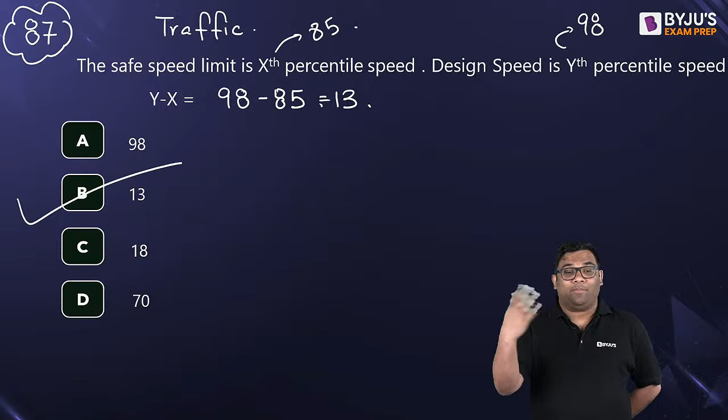Question number 88, we are going towards the end. Some questions on hydrograph also. Hydrograph, come on, tell me. Means hydrology.

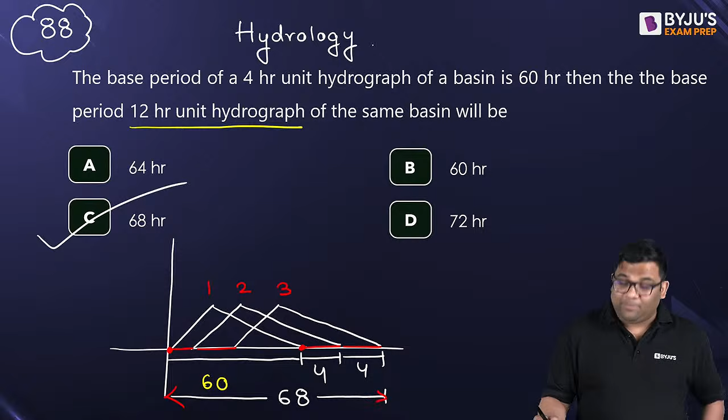Understood everyone? You see, here originally it was from here to here, then this is the first one. Then we repeated the second one with a delay of 4, so here also 4. Then the third one, we repeated after a delay of 4, this also 4. So total becomes 60 plus 4 plus 4. Good question, next is the 89th question.

Okay, this is from your bitumen test. So this is from highway materials, or we can say pavement materials also. So answer this.

Pensky-Martens test. Which apparatus is it associated with? Yes, it is flash and fire point.

Next question is the 90th question. Okay, soil mechanics, we are approaching. Very good, soil mechanics. You have to complete by 6:45.

10 questions, 7 minutes, come on. Coefficient of permeability is halved, coefficient of permeability is K, and coefficient of volume compression MV is doubled. So what will happen to coefficient of consolidation? What is coefficient of consolidation? It is K by gamma W MV. So K is halved and MV is doubled.

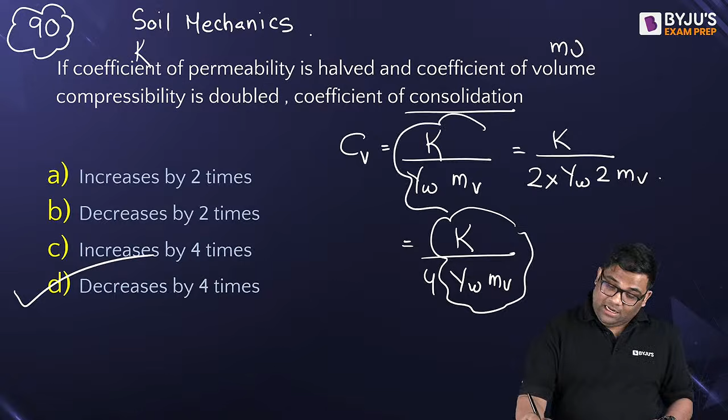So what happens? This is K by 4 times of gamma W MV. So this was original C, so it decreases by 4 times. Answer is D, doesn't increase. See, 4 times, you understood? But is it increasing or decreasing? It is decreasing. Why? Because whatever was original, I am dividing it by 4. So it decreases by 4 times.

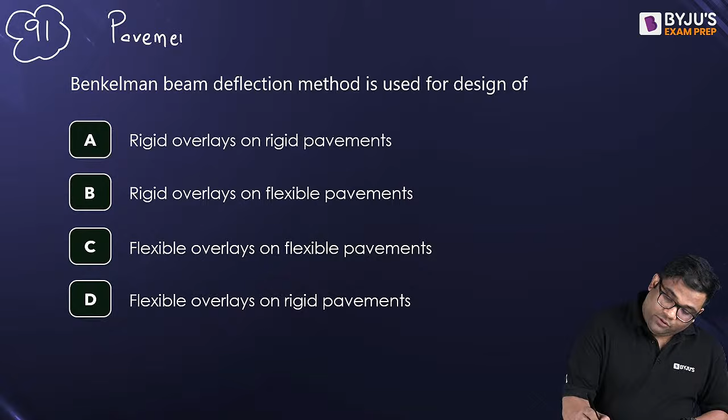Next is the 91st question, a theoretical question on pavement design. Answer this. Very straightforward question: Benkelman beam deflection method is used for design of what? Come on, fast, very simple question. So overlay means what? Already there is a layer.

We are putting another layer, right? So already there is a layer, we are putting another layer. So what can we say? Which is the answer to this? C, yes, flexible overlays on flexible pavement. Already there was a flexible pavement, it was damaged, so we are putting another flexible layer as a repair, we can say. So see, 92nd question.

Dimensions of Manning's constant, N. Answer this. Dimension of Manning's roughness coefficient. You can use the formula also if you get confused in this. Now you can use the formula: 1 by n, we revise this also, R to the power 2 by 3, then S half.

You see, velocity has the unit of what? Meter per second, right? So this is 1 by n, this will be meter only, na? Meter to the power 2 by 3, and slope doesn't have any unit. So I can say from here n will be equal to m to the power 2 by 3, and minus 1, then multiplied by second. So I can say meter to the power minus 1 by 3 and second. So length dimension to the power minus 1 by 3 and second is time. So answer is B, very good.

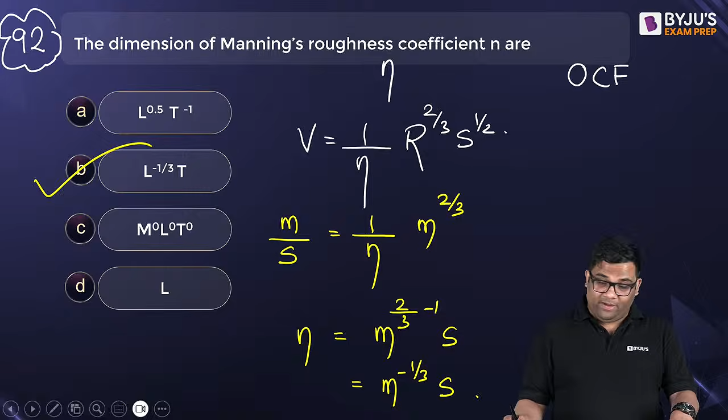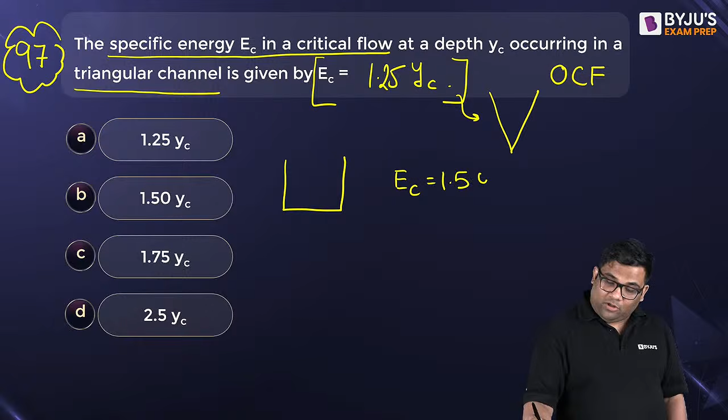For a rectangular channel, the same formula changes to 1.5. Remember this, we have solved one question also. The answer is A. Next is 98th question.

From pavement materials, bitumen test. The softening test, while conducting it, what are you actually measuring there, and the result is expressed in what? We are measuring the thermal susceptibility, or the sensitivity of the bitumen to temperature changes. But actually the result is expressed in temperature.

Softening point is a temperature, the temperature at which we get a certain degree of softness. 99th question, 2 questions more to go, we'll complete before time. Very good.

The maximum allowable shear stress, tau C max, it depends on what? Grade of steel, grade of concrete, both, none, what?

Yes, it depends only on grade of concrete, approximately 0.625 root FCK. It only depends on grade of concrete. See, tau C depends on grade of concrete and percentage of tensile steel, but this is tau C max, not tau C.

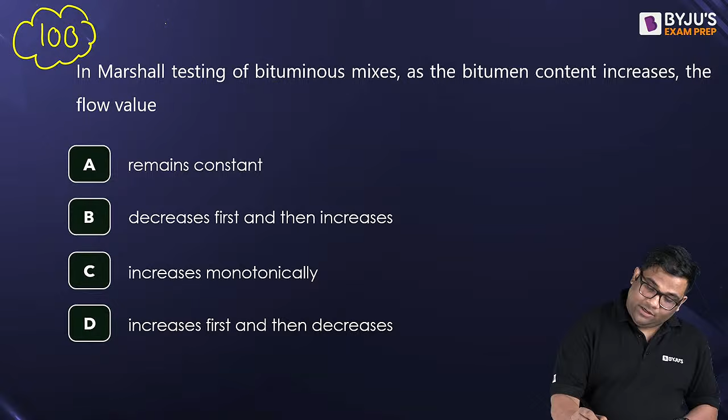Very good, 100th question. This is from pavement design, pavement materials. In Marshall testing, as the bitumen percentage increases, what happens to the flow?

Flow is the deformation, right? So if you have a Marshall sample like this and you apply a load, if the bitumen percentage is more, then the flow will increase, will keep on increasing, because more bitumen means it will be more flexible, it can flow more.

So it increases monotonically. Great, 100 questions we solved in 105 minutes, almost 1 hour 45 minutes, and you can see I completely mixed questions of open channel flow, transportation engineering, soil mechanics, RCC, steel, and strength of materials.

So 5-6 subjects I mixed very nicely. We will conduct more sessions like this.